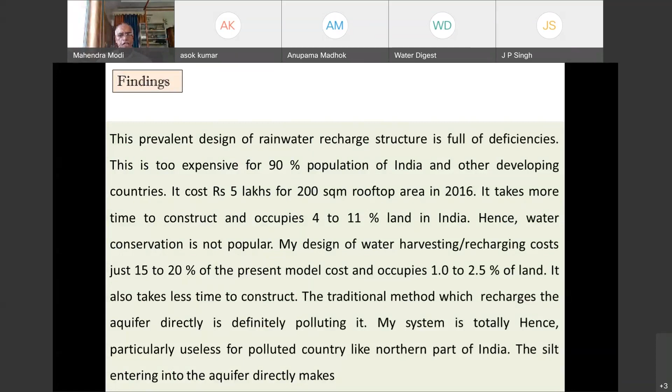But this has been prohibited by the Honorable National Green Tribunal and the Groundwater Regulation Act of different states. Why are there disadvantages of this system? What are the disadvantages?

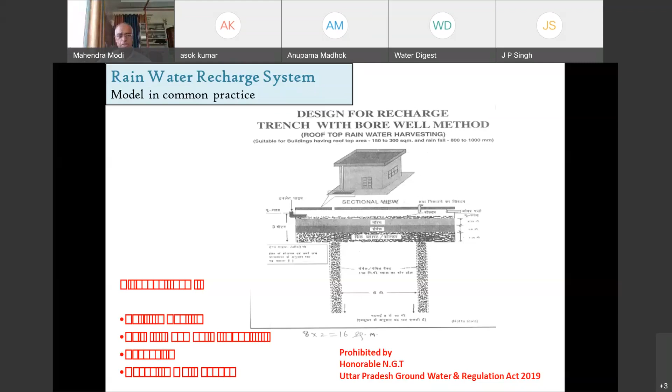The rainwater recharges not only vertically downward, but also in all 4 horizontal directions outwardly. This is possible by making the system in such a way, which I have developed after practical experimentation for the last 15 years or so.

Now, this system eliminates the possibility of making the aquifer polluted. It prohibits acid rain, harmful bacteria, any kind of bird droppings, any kind of insects, and any kind of soluble chemicals.

Now, after that, whatever silt is deposited in this small chamber - there are two chambers. The small one, I have to desilt only the small chamber.

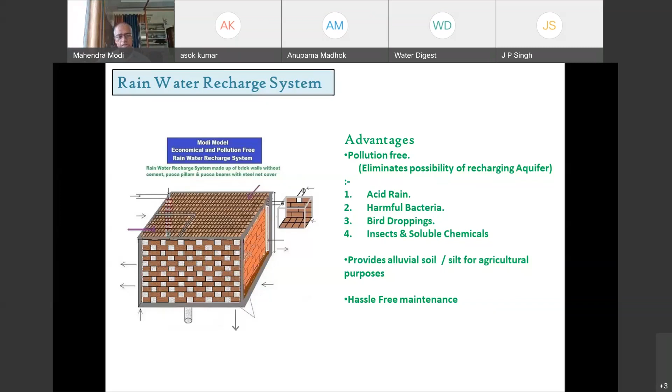On the left-hand side, you are seeing, this is already functional at Police Enclave Vibhuti Khand, Lucknow, India. Now, the main chamber is here. Here is the small chamber. Here is a chamber without using cement, it is made of only bricks. Bricks will be on the ground of the small chamber only. In the larger chamber, on the grounds, there are many innovations.

Now, you can see this water. This is the photograph taken in May. In May and June also, the water level is 10 feet. It means if you take a bucket, add a rope of 11 feet, you can fetch a bucket full of water. So this is the level of water.

And this is not only in Lucknow, this is also in Jhansi and at hundreds, 300s of places wherever I have started this model. Now on the right hand side is Mr. Ranjan Kumar, Divisional Commissioner, presently at Lucknow. And this system is again at Lucknow.

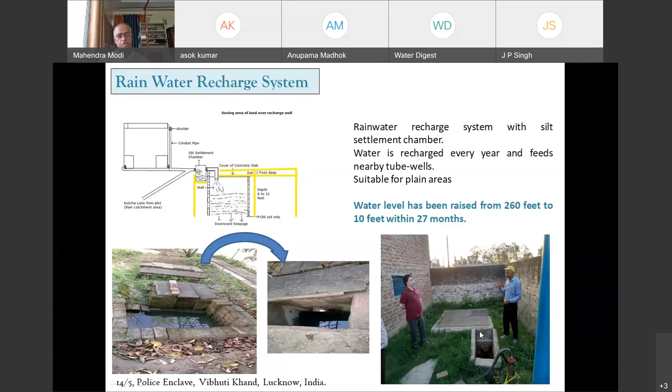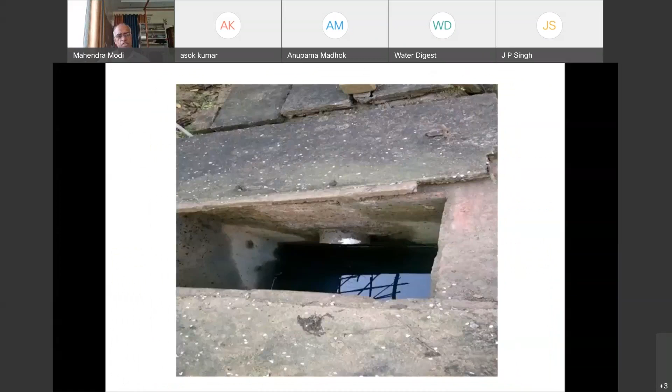And then we are coming to another model, that is at Technical Services Headquarters, the Forensic Science Laboratory Headquarter at Lucknow, where in approximately 1,43,000 square feet area, I returned the government money, almost 45 lakhs back. And then just by Shramdan, within 15 days, we started 95% water recharging.

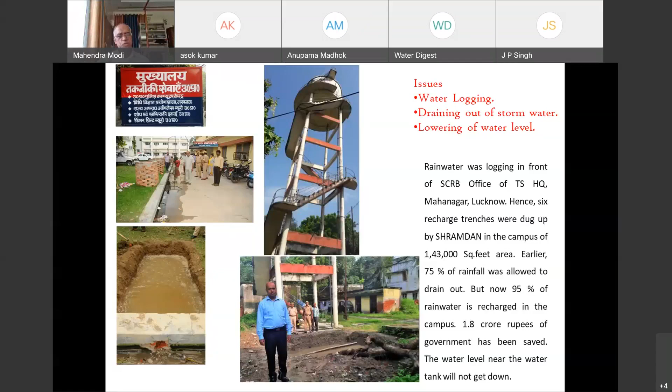This is Sakrar Jhansi Gausala, 15 acres of land that was barren. Now it is lush green, just by recharging with the help of Shramdan. So it can do wonders.

Then we have the system of wells revival. Another model I have is called Mahendra Koop, Maha Indra Koop. Koop means well, Indra is related to the god of water. You can see before, this well was dead, now water has come up. Then there are 3-4 models depending on soil composition. In the Mahendra Koop model there are 3 kinds of minor modifications, varying according to plateau area, hilly area, or plain area.

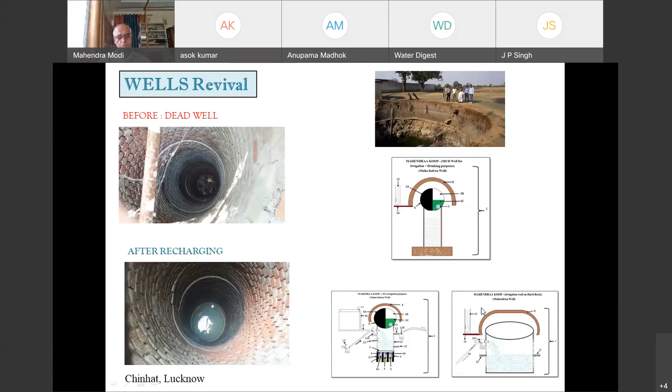You can see this well was dried up for almost 18 years. It got cleaned up, and after cleaning, this is the model. Then trenches were made around the well. Now this is the revived well, providing water for all 365 days, and this happened in just one monsoon of recharging.

Now why is this successful? Why is one monsoon recharging sufficient? Because around the well, 3 trenches have to be dug up, and all the water passing in the lanes besides the well is stopped by making a bund, and after that rainwater is collected and recharged into these trenches.

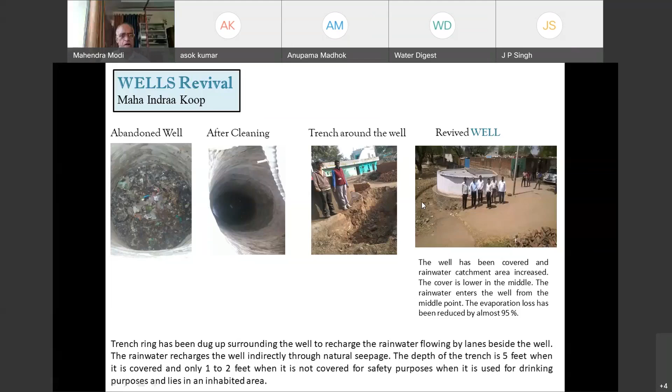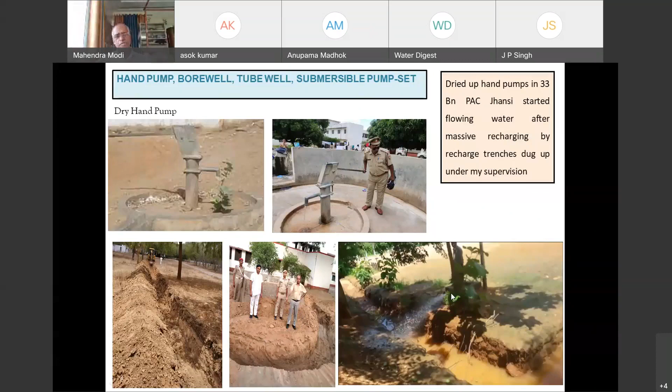Now, what precautions should we have while making a trench? The trench surrounded nearest to the well, nearest to the hand pump, should be almost 5 feet deep. But the added linked trench to it can be just 3 feet deep, 2 feet deep, and it should be able to stop all the runoff of rainwater passing through it. It will collect it for maximum time and recharge the nearest vicinity of the hand pump.

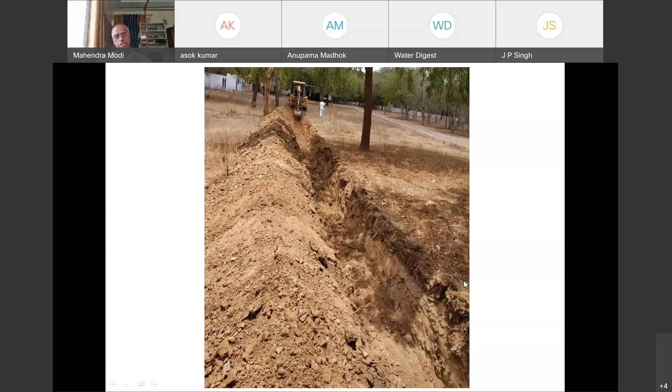The Paris Accord was signed in December 2015, dedicated to arresting global warming, reducing the temperature of the world by 2 degrees Celsius or 1.5 degrees Celsius compared to the pre-industrial stage. Naturally, it is a huge, ambitious task, and this calls for cooperation not only from the government or governments of India and states of India, but from all of India.

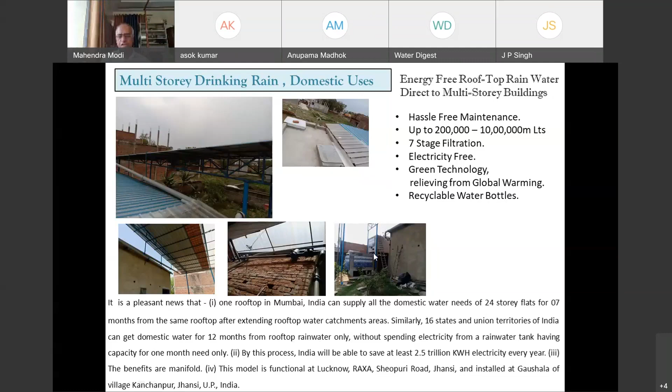If we see the population of Delhi to be around 2 crores or more, whatever water falls in Delhi, if we collect according to the advice and slogan of the Honorable Prime Minister of India - catch the rain wherever it rains, when it rains - then every citizen of Delhi should have 70% more water than he needs. This model is my model in the sense that, without spending electricity, because we are not extracting groundwater, but with the help of gravitational pull, we are collecting it.

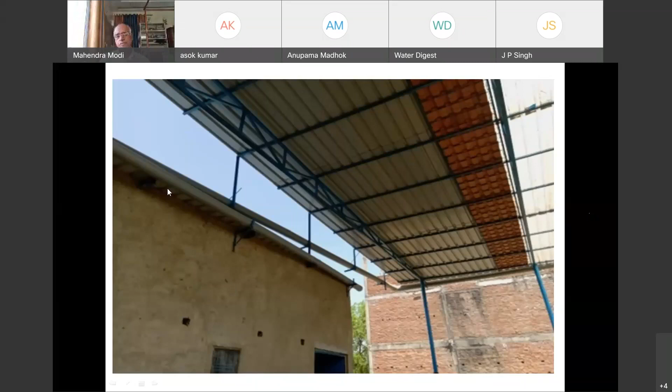These are the collection pipes. Then this will go to the water tank. Now, overhead tanks all over India have one design. And what is the design? The rainwater falling over the overhead tank goes waste to the ground. We do not collect it.

But in this model, there are so many innovations. Number one, all the rainwater - that is 80% of the rainwater, because I have 3 parts in the tank, T1, T2, T3, 3 chambers of the rainwater tank. Chamber number 1 and 2, all the water falling over chamber 1 and 2, that is 80% of the falling rainwater, will also be collected inside the rainwater tank. And this is the tank.

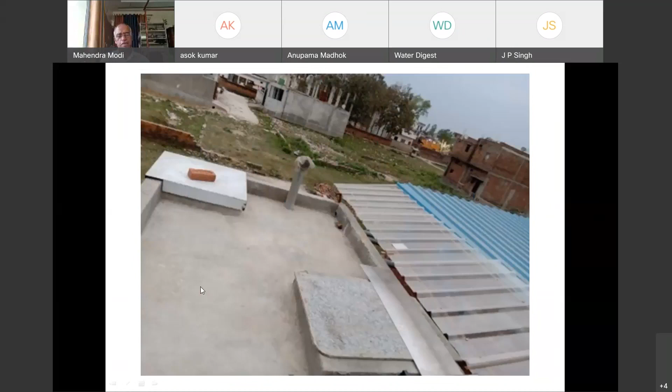Now, to give a closer picture of it, here is the rooftop of the rainwater tank. This rainwater also gets collected from this place. Before that, I throw out the acid rain, and I show you here - yes, this is the filter and valve.

The valve throws out the waste drain and dirty water also. After that, 10 micron filters are there. Then after filtration, the water goes inside the tank.

Inside the tank, again, there are so many innovations to clean it further. Before falling into T3, that is tank number 3, again there is a chamber having a sand filter - which is not needed, but a carbon filter is needed, so carbon filter is there. Thereafter, in the last stage, drinking water will be made after passing through the UV filter, that is ultraviolet filter. So here will be the ultraviolet filter, and then this is drinking water.

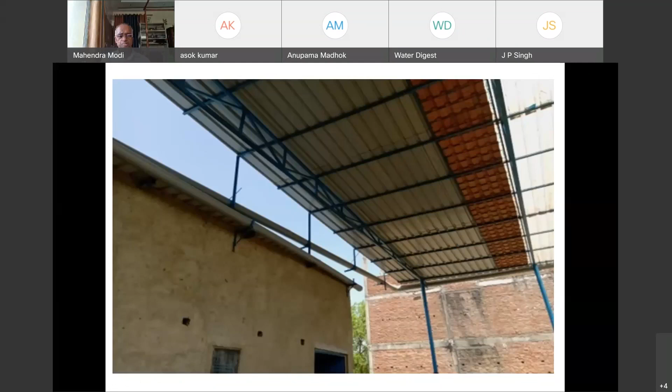The chamber has a capacity of 15,000 liters - that is the capacity for one month's water for one family, drinking water and all kinds of water. So here is a lesson for those companies who extract groundwater for making mineral water or bottled water. For bottling water, I am providing employment opportunities to young people.

This is the model. Just now, during the lockdown period, I constructed it with my personal resources and with the help of some friends, and with some Shramdan also. This drinking water will come in recyclable bottles, so it will be a totally green movement, and this has to be done and followed all over India.

Why all over India? Because if this system is applied in every building of India, it is applicable all over India, or even all over the world. If we do so, in India itself, according to preliminary estimate, 2.5 trillion kilowatt hours of electricity will be saved.

Now, why am I putting emphasis on saving electricity? Because though the Honorable Prime Minister has made efforts to promote green energy and solar energy for us, even now 61.5% of electricity used in India is thermal power. Out of that, 53% is from coal, and coal is very, very polluting. We have to arrest global warming and pollution. This thermal power, especially coal, diesel, gas or lignite power, is adding to global warming, and we have to reduce global warming.

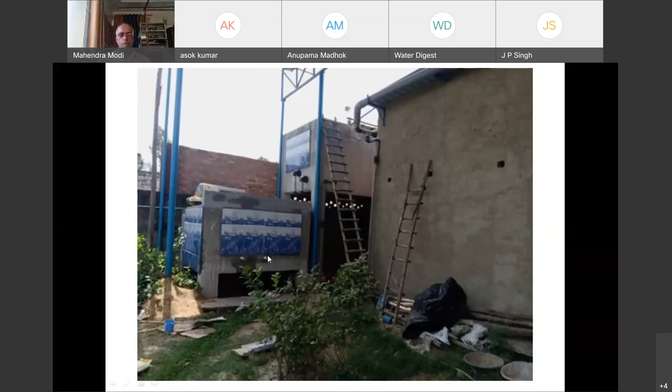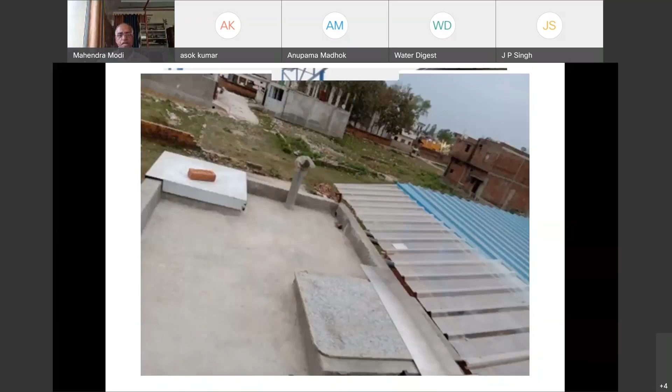So now I'm switching over to another model. All this I've told you, and I'm also showing you the minerals. When you talk of this, one may raise the question that it is as good as RO water or distilled water. Agreed, but this is not harmful. It's not tasteless, it's very tasty water. And if you want minerals, why not have natural minerals? Where will we get those natural minerals? We can have mineralization for that. But I'm not suggesting mineralization, though it can be done.

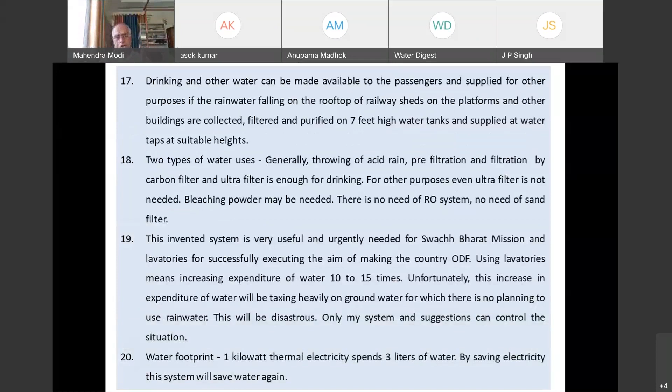Now, experience shows for each and every state, at least 40% of districts of India, if they adopt my model - suppose we are in Meghalaya with 15 to 37 floor buildings - just by having a 15,000 liter tank, that is 1 month's capacity of rainwater, you can have 12 months of water for domestic purposes, all kinds of domestic purposes.

I divide India into 3 parts for this purpose. Some will have 10 months, some 8 months, some 6 months, but you will have this rainwater. And if we don't draw groundwater, don't extract or exploit groundwater for 6, 10, or 12 months, we will be saving and raising the water table.

So that's what I emphasize: raising the water table of the ground is a precondition or prerequisite for the Jal Jeevan Mission to meet success. Now, all the states have calculated how many months of water can be saved and how much electricity can be saved. And if you go for all over the world, almost 8 trillion kilowatt hours of electricity can be saved.

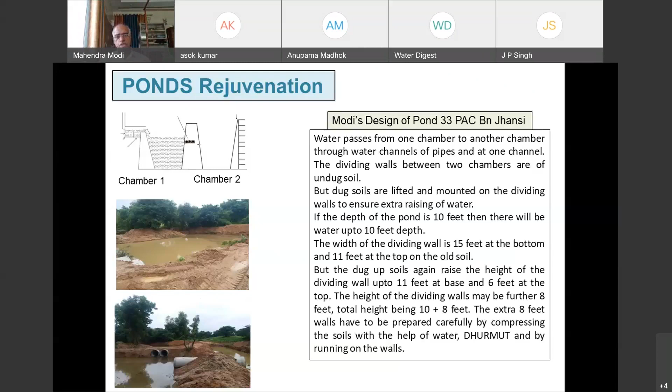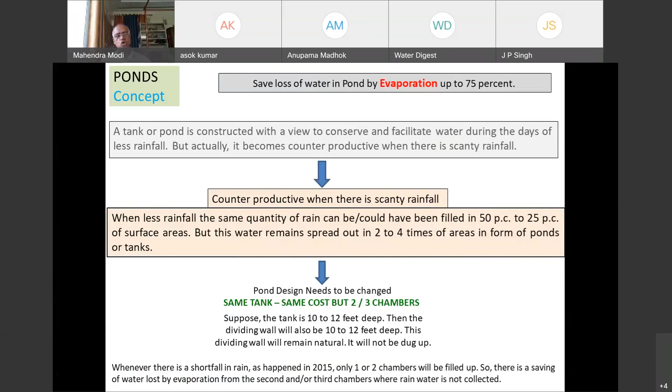So I'm giving you the advantages you can have. It provides a rainwater desilting, storing and conservation system, which reduces the loss of water due to evaporation. Whenever there is less rainfall, this invented water conservation system reduces loss of water by evaporation.

जब बारिश कम होगी तो हमारा जो वास्तविक रूप से पानी का नुकसान हो रहा है, वह हानि 50% से लेकर 75% तक घट जाएगी। आम आदमी इसे बढ़िया से बना सकता है।

जब भारत की ये योजना चली, हर खेत में पानी और उसमें हर खेत में तालाब की बात करते हैं, तो कई जगहों पर लोग गलती से 4%, 6%, 10% तक एरिया सिर्फ तालाब में बर्बाद कर देते हैं। इसकी कोई जरूरत नहीं है। रिचार्जिंग के लिए मैं आपको बता दूं, चूंकि 5 दिशाओं में तालाब से पानी रिचार्ज होता है, तो रिचार्जिंग के लिए 1% से मैक्सिमम 2.5% वाटर कैचमेंट एरिया सफिशिएंट है।

तालाब करने के लिए, जलाशय बनाने के लिए, और जब उसका पानी सिंचाई के लिए प्रयोग करना चाहेंगे, when we want to use it for irrigation, then also the depth may be 12 feet, but the recharge area or the area of the pond need not exceed 2.5% at all.

No big tank is needed. The problem with present models is that instead of adding all the water catchment areas and connecting them with the ponds, they are just making problems by enlarging the surface area of the pond. Larger the surface area, more is the evaporation loss, so it has to be controlled.

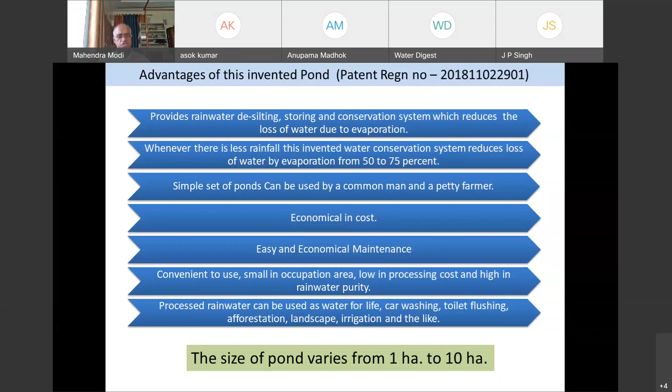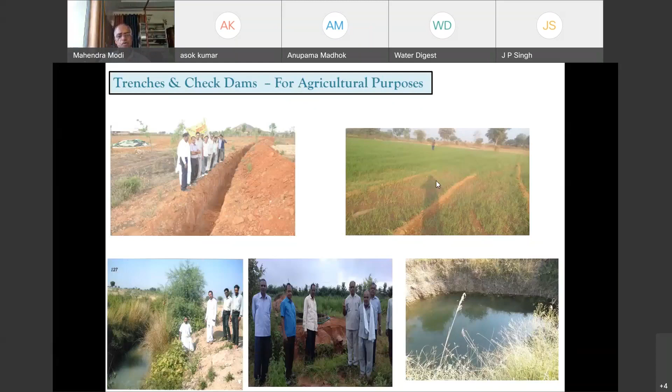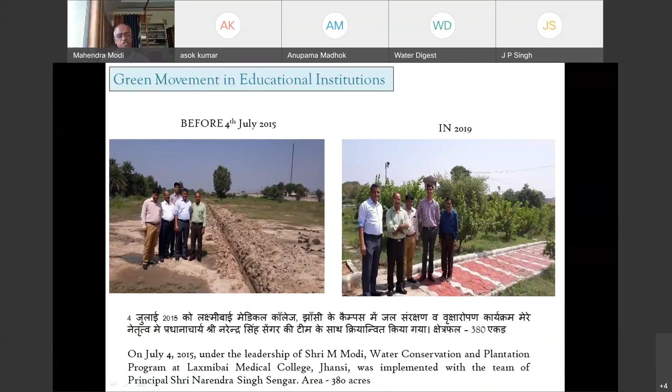There are 380 acres of land. And then I also suggest that instead of having a bath with soap, have lemon baths.

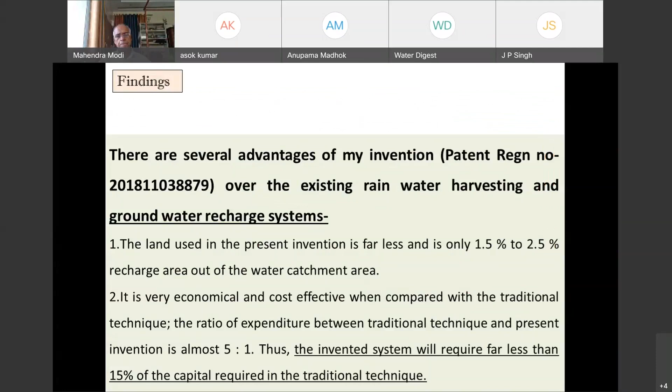We had this movement, and this can be continued with the help of the government. We also have Mr. Sunil Kapoor with us. We can have a common academy for training all the people of India in water conservation.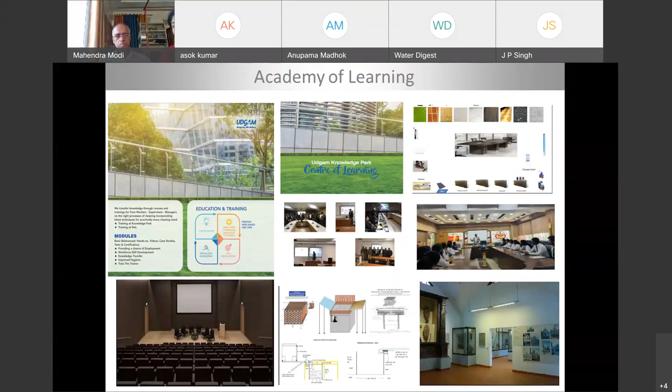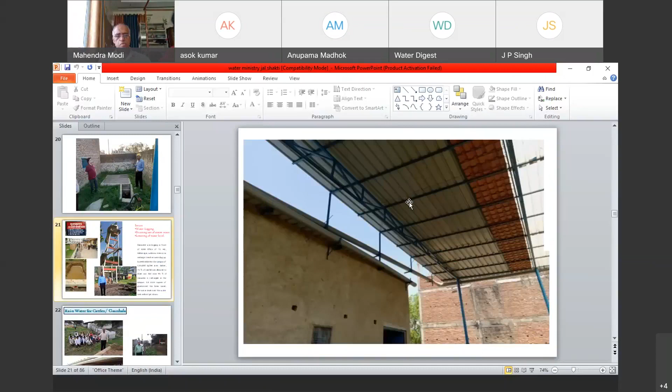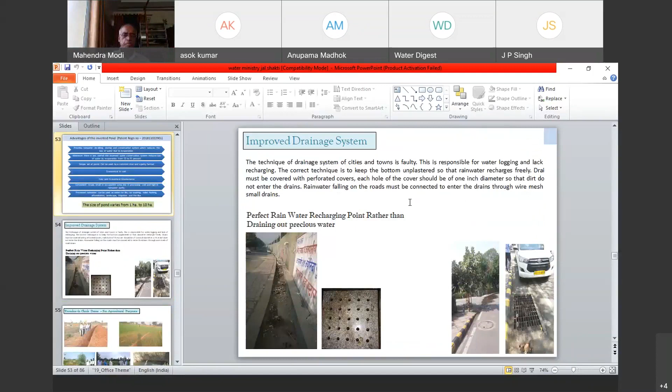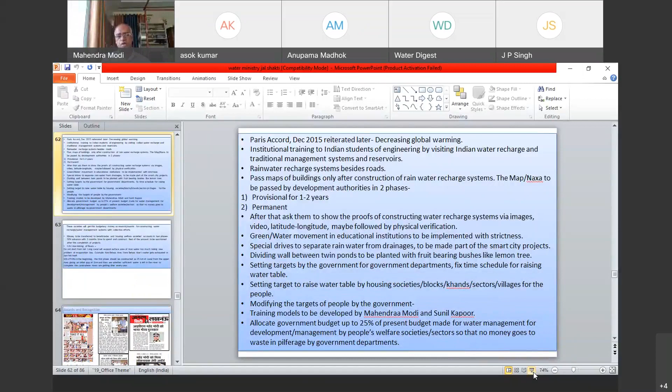Now I have some suggestions for the government as well. About the straightforward ones, I have already told you. Institutional training to Indian students of engineering should have a change. All the rich traditional water harvesting and management systems built during the reign of Krishnadev Raya ji, Ahilyabai ji, and all the old kingdoms should be studied, be it Jabalpur or Bijapur or anywhere in India. But our Indian students are not studying it. That should be made compulsory as part of the educational curriculum. Then the rainwater recharge system beside the roads, as part of the smart city, must be undertaken.

When we have rainwater recharge system provisions in buildings, some states require it for 200 square meters, some for 300 square meters compulsory. But this so-called compulsory is only on paper, because after submitting the map and getting it passed, they forget to make the rainwater recharge systems in their homes.

So what should we do? There should be some changes. The passing of maps should be a two-phase event. First should be a provisional map for 1 or 2 years, second will be the permanent map. After you complete the rainwater recharge and harvesting system during the first year or maximum 2 years, only then your map will be passed permanently.

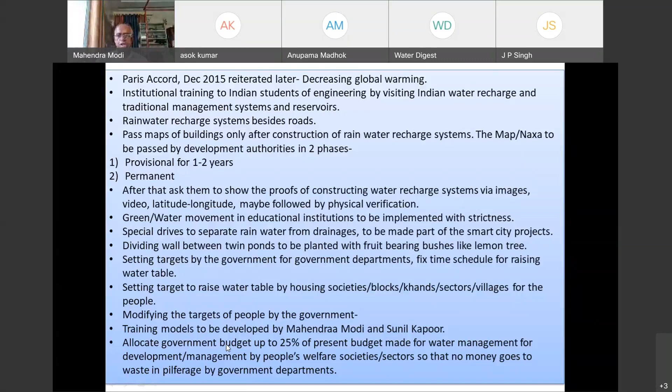Very nice sir, it was an excellent talk. You made very practical points - we have done many webinars where theoretical expressions come up, but you've made very practical points, and some of them actually link up with what we had been telling.

Our Catch the Rain campaign, sir, we have been running for the last 1 year. We started it last year in February. Whatever points you mentioned, most of them are part of it, sir. Our first primary emphasis was on rooftop rainwater harvesting structures, and we clearly said not a single drop of water should come out of the compound, as you mentioned. So we had been telling people that rooftop rainwater harvesting structures in all buildings - and this point you mentioned, that structures are built and then the water is wasted.

So I had actually flagged this up in many meetings, today morning also in the Nehru Yuva Kendra meeting. I suggested that maintenance is one major issue. As you mentioned, for sanction they show this, they build something, and after sanction they abandon it, so the rainwater harvesting doesn't actually happen. So we have suggested that in the Catch the Rain campaign drive we are now doing, one of the first primary focuses is the maintenance of existing rainwater harvesting structures.